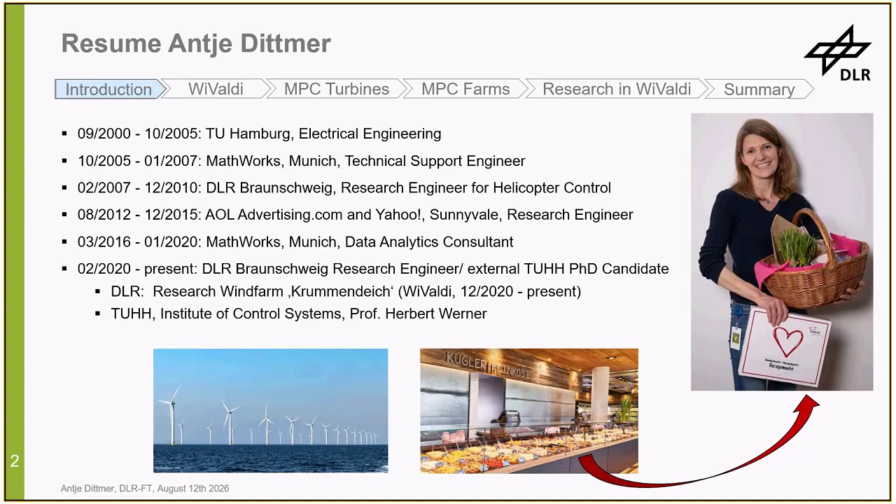I also want to introduce my research organization, the German Aerospace Center, Deutsches Zentrum für Luft- und Raumfahrt, DLR for short. DLR does research in the areas of aeronautics, space, transport, energy, and security. It is the largest German research organization with more than 10,000 employees and now more than 50 institutes.

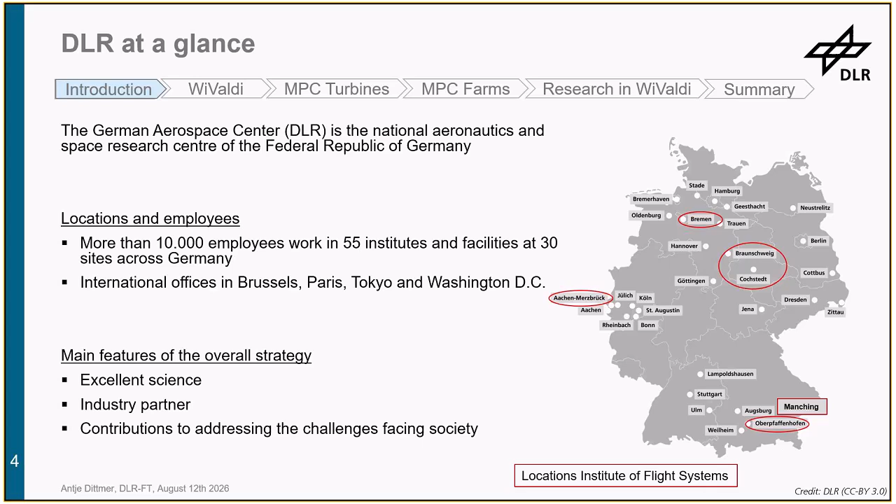placed all over Germany. DLR sees itself as a bridge between academia and industry, fostering cutting-edge research together with universities and bringing that into the real world together with our partners from industry. My institute, the Institute of Flight Systems, has sites at 6 locations.

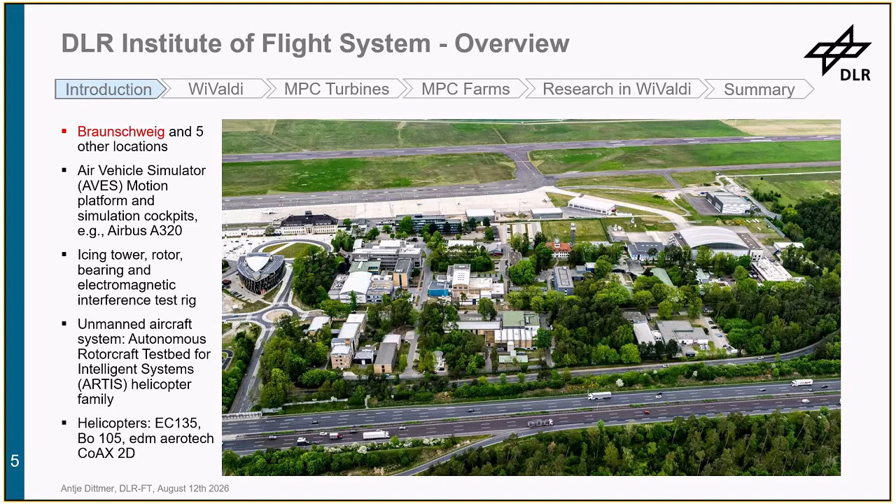This is an aerial view of Braunschweig, where the institute originates from and where most of our colleagues work. It is also home of our largest test bench, the simulation center AVES, where we can simulate the behavior of aircrafts and helicopters. We have also other test benches, including an icing tower, where we can test the behavior of helicopter rotor blades under icing conditions.

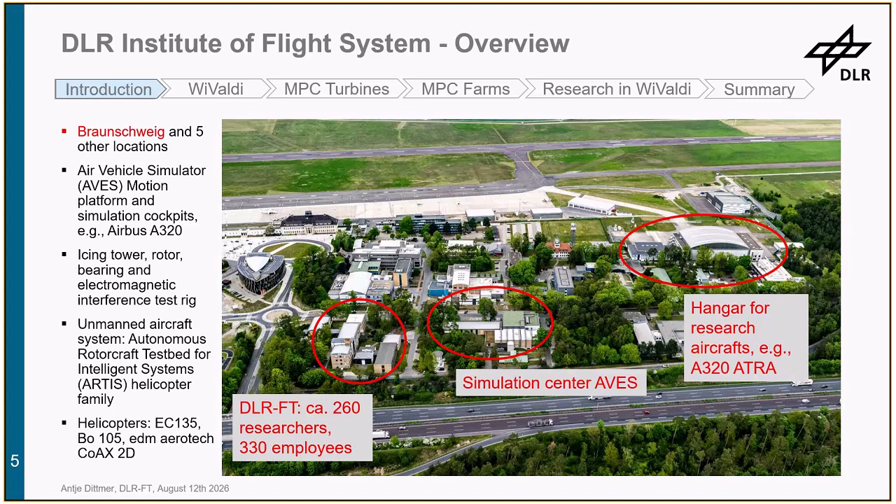We operate several helicopter UAVs. And this is the hangar which is home to some of the aircraft of our research aircraft fleet, the largest one being an A320. We also have 3 research helicopters, a BO 105, an EC 135, and a small coax helicopter.

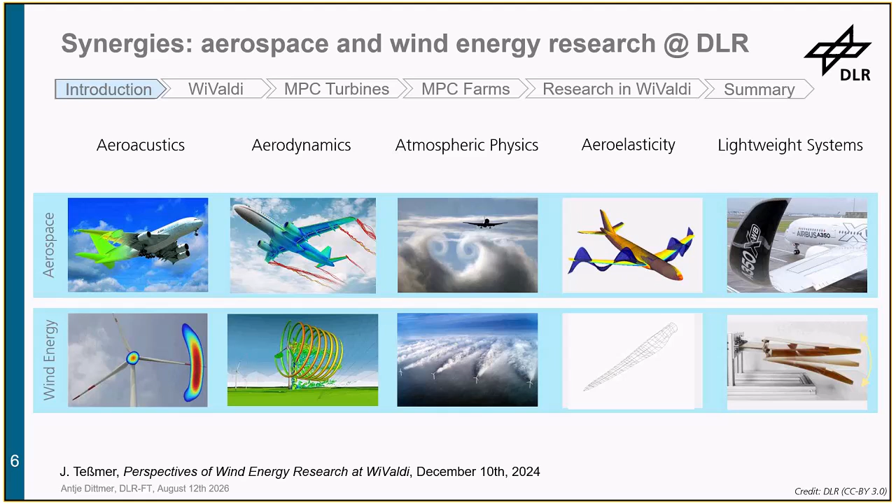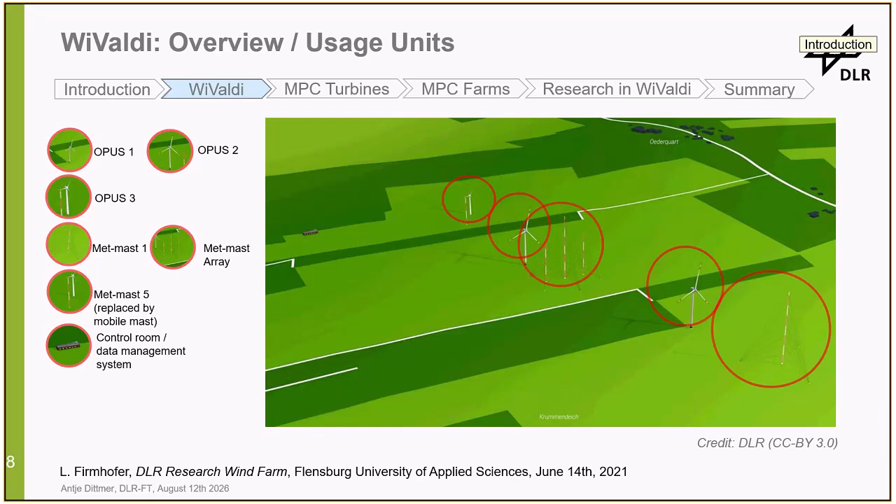The 2 megawatt turbines, Opus 1 and 2, are Enercon E115 EP3 E4 turbines, rated at a power of 4.26 megawatts. So they are normal industry-sized megawatt turbines. What sets them apart is that they are literally equipped with thousands of sensors, so there are sensors in the foundation, in the tower, in the bearings, and in the rotor blades.

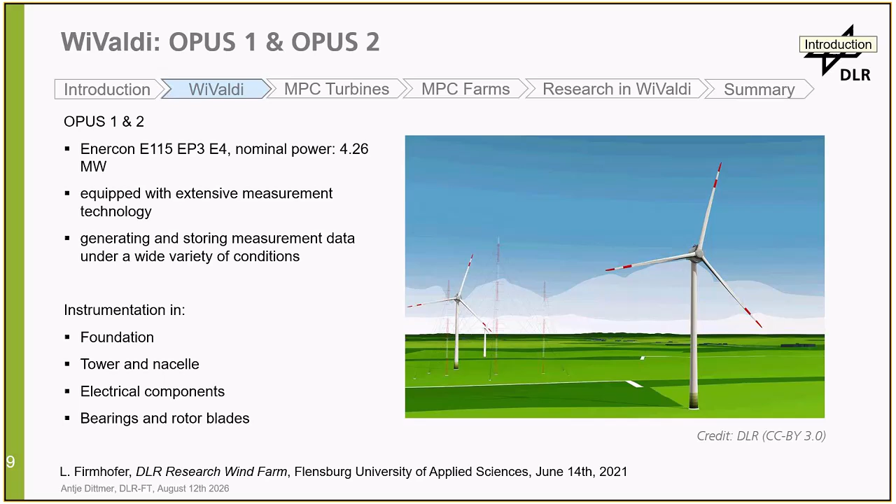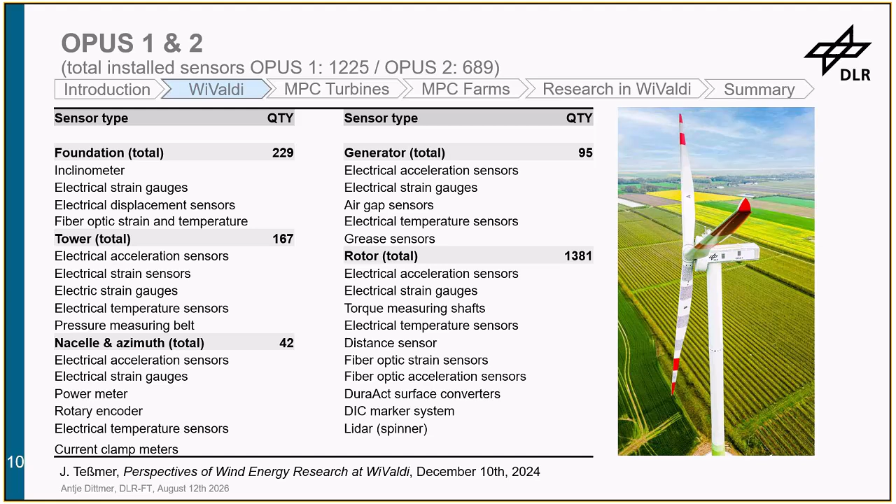This is a list of the sensors which are placed in the first turbine, as well as a picture of it. You can see that the rotor blades have names A, B, and C, and also that there are points on the rotor blades to track their movements very accurately.

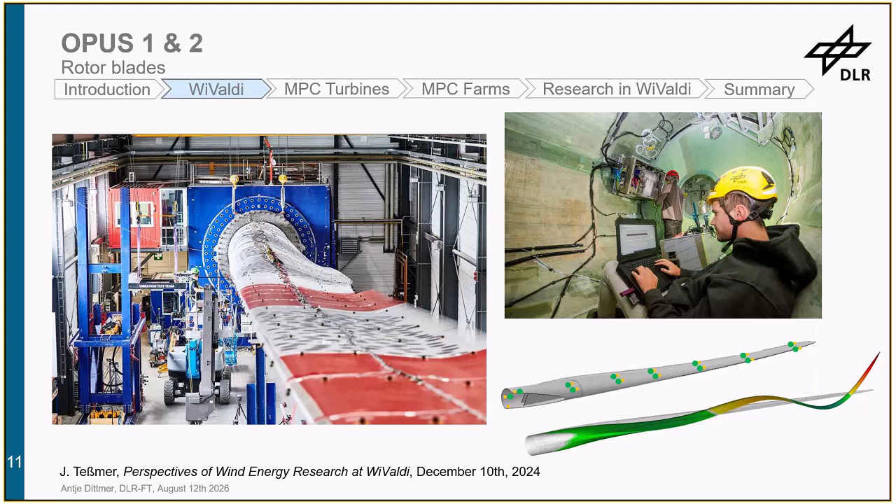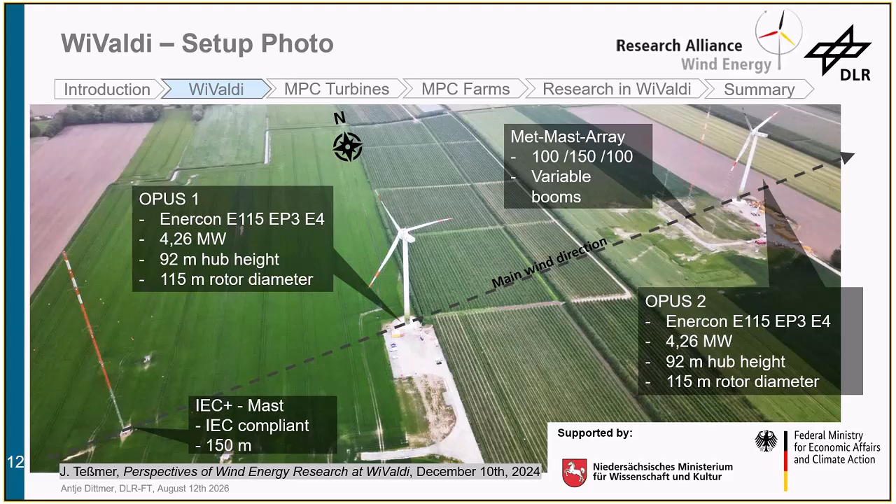So normally you would never place two turbines in main wind direction. We do that to investigate wake effects, which are a major problem for onshore turbines, where turbines are placed closer and closer together. So we want to be able to understand wakes, to be able to mitigate the effects.

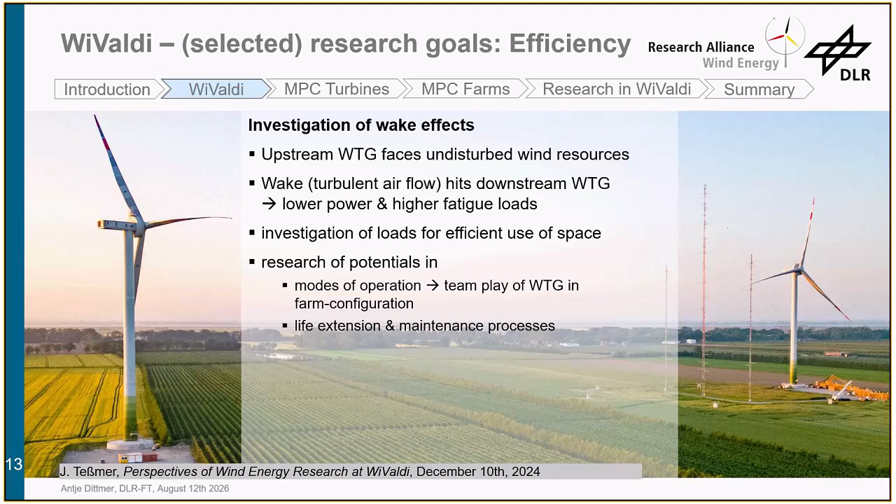First of all, they take away energy from downstream turbines, and then they actually also add loads to them. So there are two aims. First, ideally, we want to be able to increase the power output of wind farms by operating the wind turbines as team players, and by lowering the mechanical loads on the downstream turbines, we also want to extend their life and decrease the maintenance and operation costs.

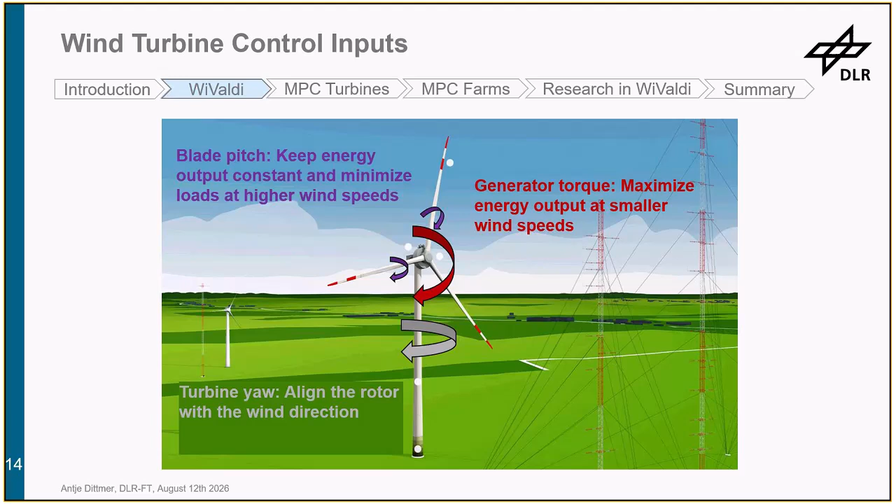These are the control inputs that we have on the turbine. In high wind speeds, we can pitch the blades to keep the energy output constant, as well as to minimize the mechanical loads acting on the structure. In lower wind speeds, we use the generator torque to maximize the energy output. And then finally, we can also yaw the turbine to put it into the wind.

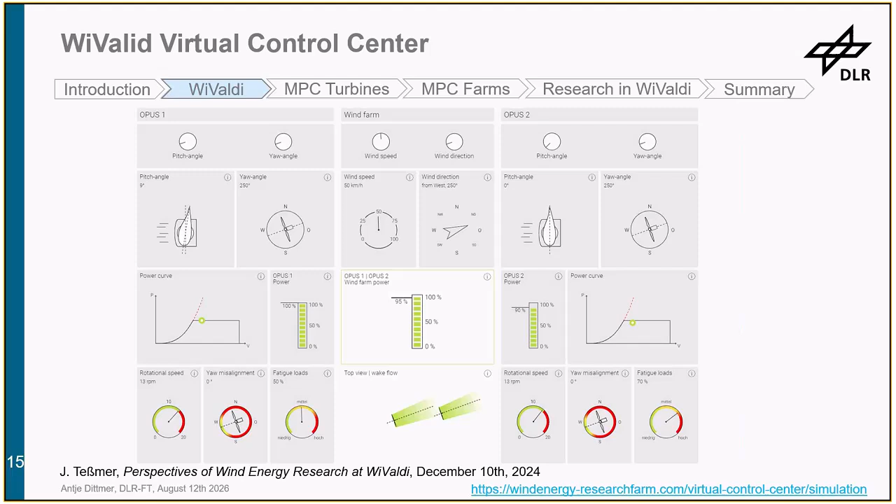Here, this turbine is operated at rated wind speed. You can see the power curve with the power increasing with the wind speed taken to the power of 3. And then at the rated power, the wind is kept constant by pitching, the power output is kept constant by pitching the blade.

The first turbine is set directly facing the wind, and we see that the power output is at 100%. What we can also see is that the wake of this turbine covers the second turbine, and we see that its output is only roughly at 90%, and the fatigue loads are actually at 70%.

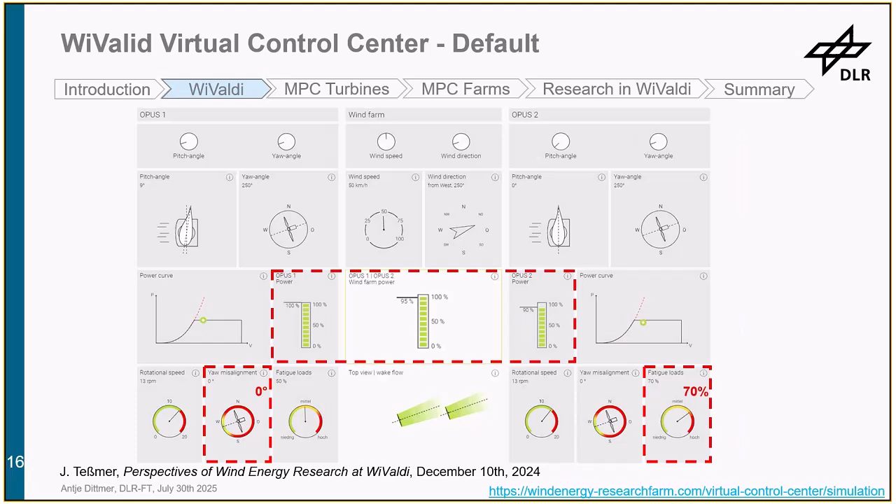Now, if we slightly misalign the first turbine, so that we have here a yaw misalignment of 5 degrees, we see that with that we get the fatigue loads down to 60%.

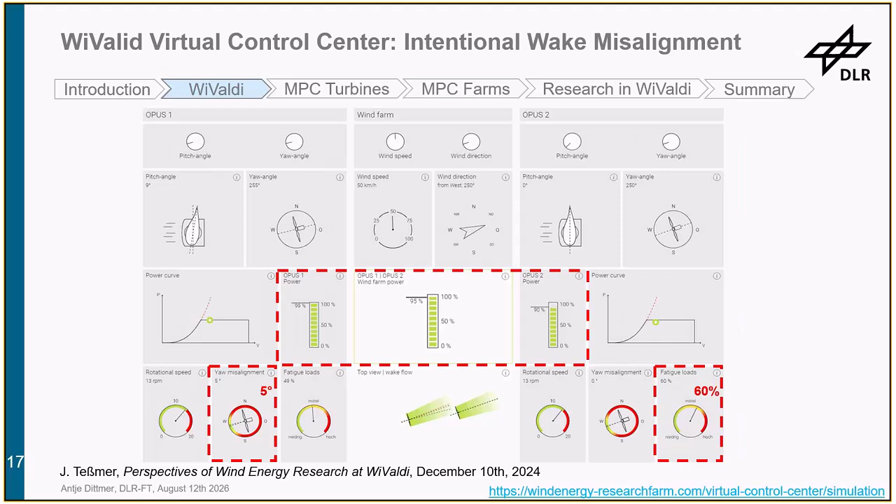I want to switch gears now and talk about how we can use model predictive control to decrease the loads acting on turbines. So wind turbine control can be seen as a multi-objective optimization problem. We want to maximize the generated power while minimizing the mechanical damage equivalent loads and the actuator activities subject to actuator constraints.

This is a very active area of research because the size of turbines has increased considerably over the last years, and with that the turbine tower and blades have become much more slender. Modern control algorithms have been shown to be very effective at decreasing these loads. However, this typically comes with an increase in pitch actuator activity.

I conducted an automatic Google Scholar search just to show you how much research effort goes into this. So obviously it's impossible to list all the papers, so I just listed 4 which were important for my work. One of the first papers is from David Schlipf, who investigated a collective pitch control MPC, so setting the pitch of all blades collectively. Then another possibility is to optimize them separately, so individually.

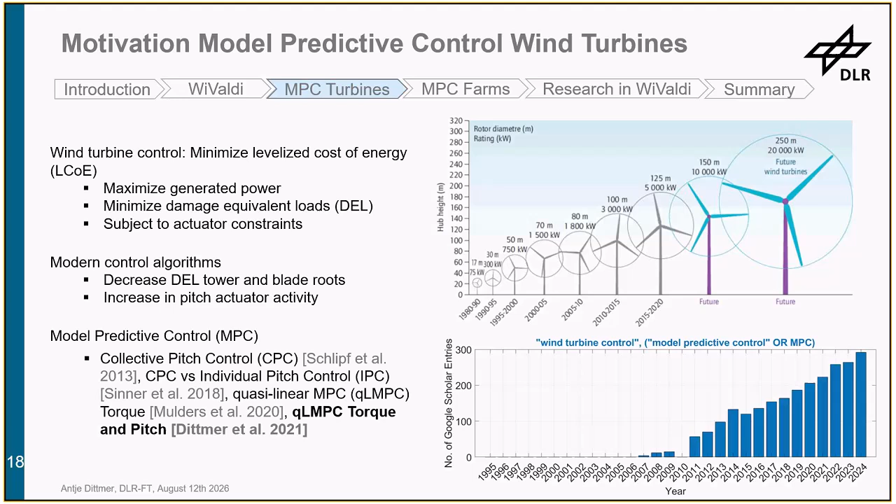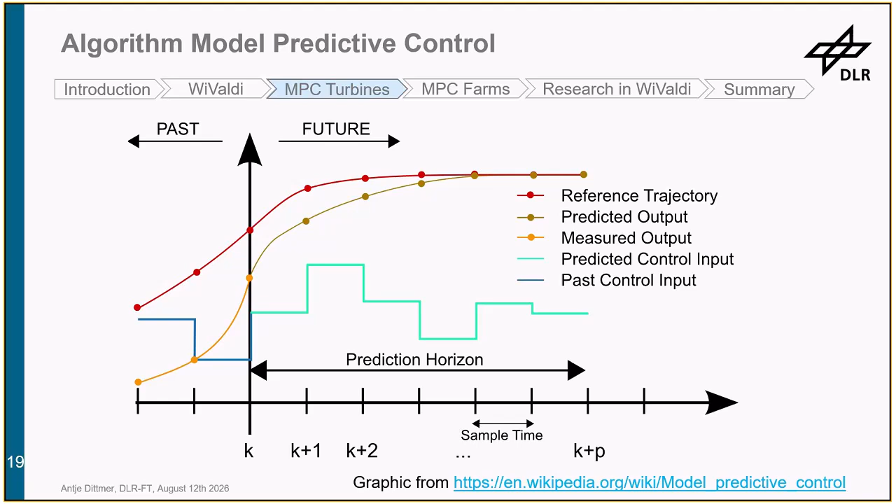For wind turbine control, we use a non-linear MPC because the mechanics and aerodynamics depend non-linearly on the wind. Then we linearize this around certain operating points, so we really use quasi-linear parameter varying modeling.

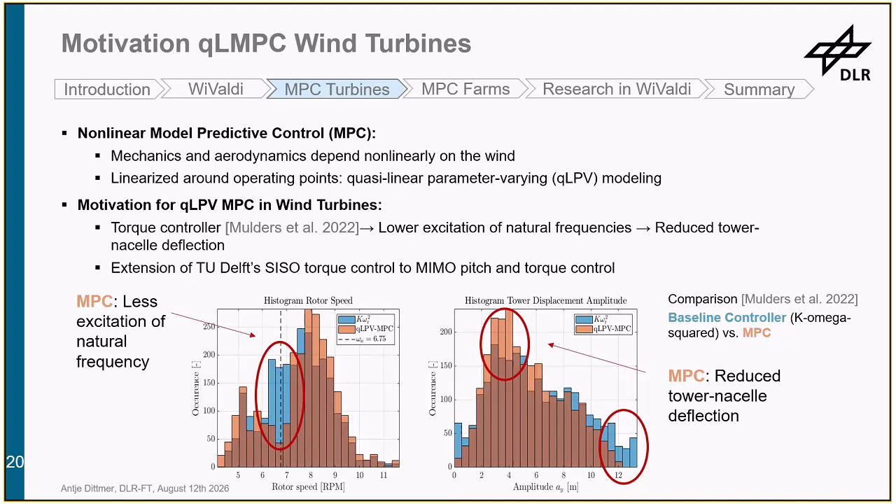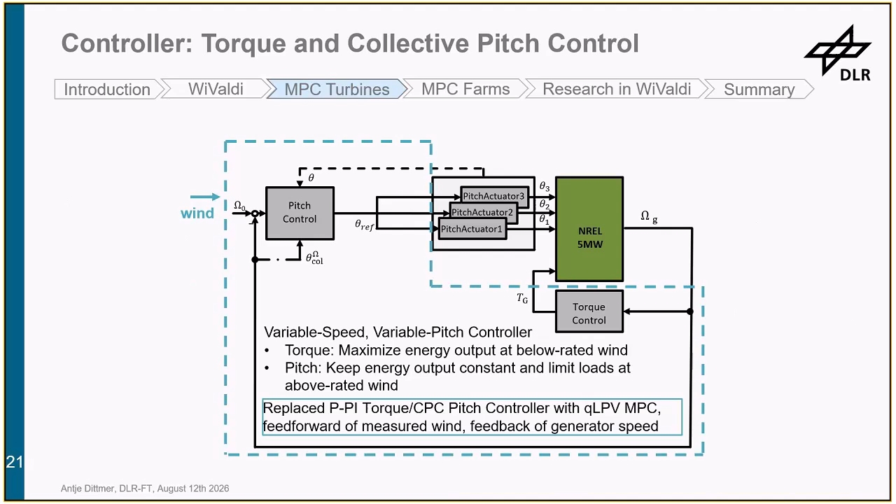Now, both of these signals are replaced by calculations done with our MPC. However, what we also use is that we assume that we have good wind knowledge to set the control signals of our MPC.

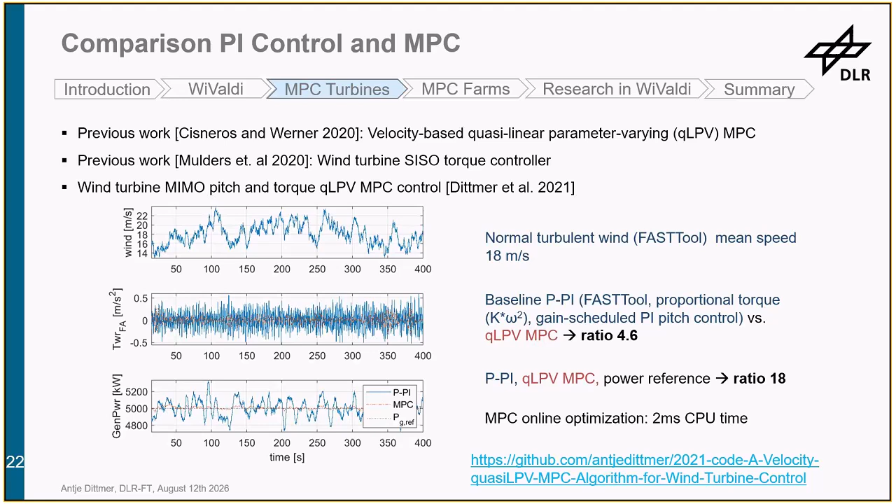Now, I mentioned before that this decrease in excitation and in power variance comes at the price of an increase in actuator activity.

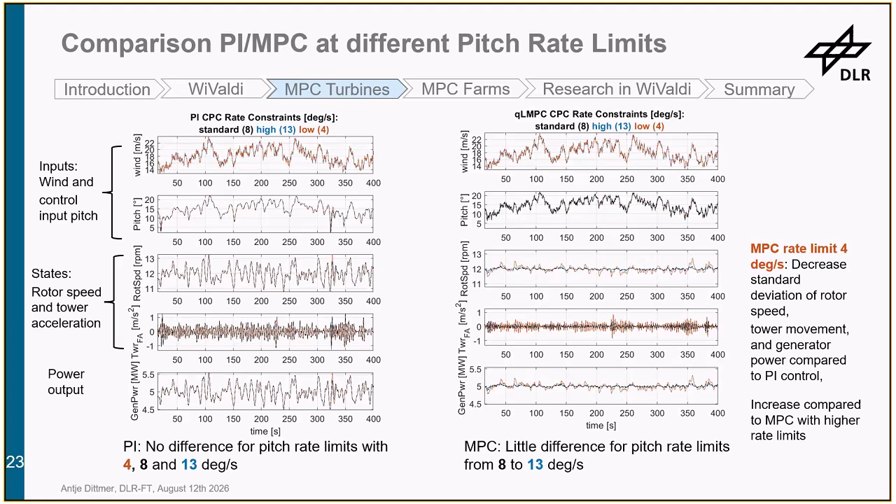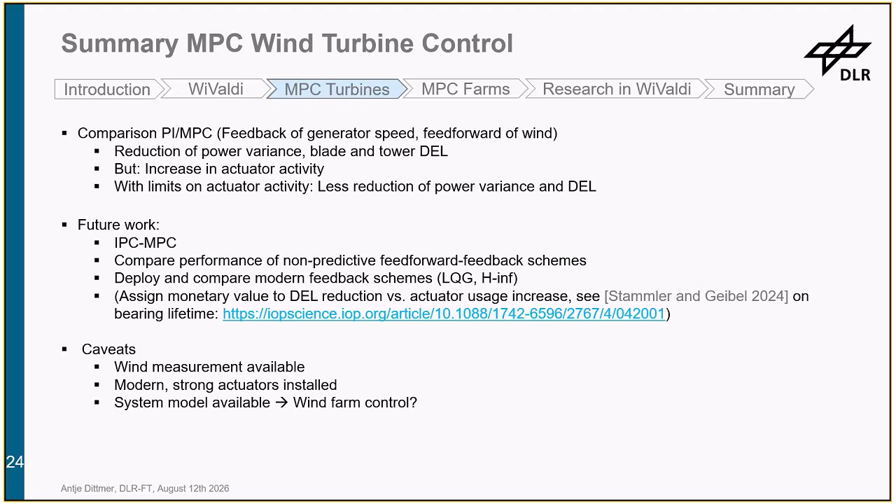Wind turbines are grouped into wind farms to make efficient use of areas suitable for harvesting wind energy. Wind farms also decrease the cost of connecting the wind turbines to the grid per turbine, as well as their operation and maintenance costs. However, wake interaction between upstream and downstream turbines leads to considerable power loss and adds additional mechanical loads on downstream turbines.

So again, we have a multi-objective optimization problem. We want to maximize the generated power or keep it as close as possible to a reference power. At the same time, we want to minimize our mechanical damage equivalent loads as well as our actuator activity, subject to actuator constraints.

There have been different methods suggested for wind farm control. In axial induction control, we throttle the power of upstream turbines to have more energy available downstream. And in wake redirection control, we change the yaw to redirect the wake away from downstream turbines.

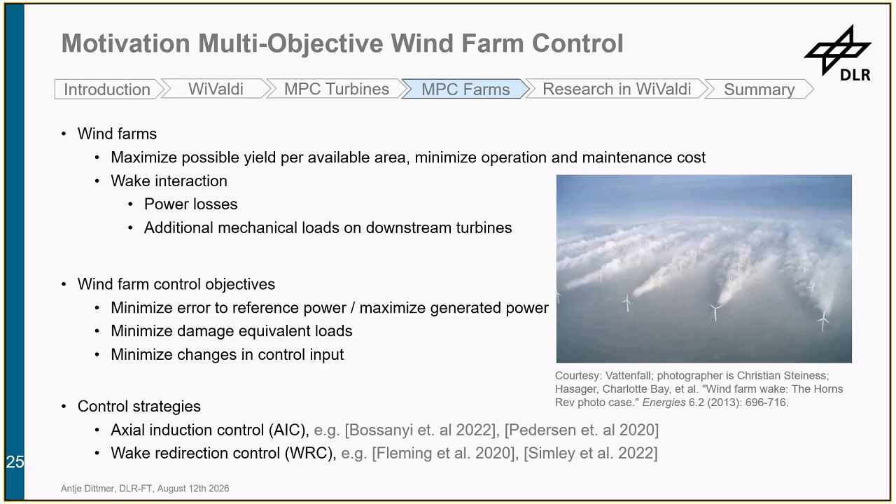We use Koopman-MPC. The idea of Koopman is that you can approximate any nonlinear system with a higher order linear model. This has been done for wind farms by Cassamo and van Wingerden from TU Delft.

What they did was use the CFD tool SOWFA to generate a 3D grid with 100,000 grid points, and then they flattened these points into vectors, applied Koopman lifting functions to them, and then singular value decomposition to reduce the order.

From that, they built linear models and then used them in MPC. We showed in our work that we actually don't need 100,000 grid points, but that we can improve power reference tracking by using physically motivated Koopman lifting functions.

We showed that we are actually really real-time capable by only using the average wind speeds at the rotor disks. Also, that if we have sudden changes in wind speed, we are able to track them with adaptive MPC. And then we showed that with a combination of wake redirection control and axial induction control, we are able to maximize power yield.

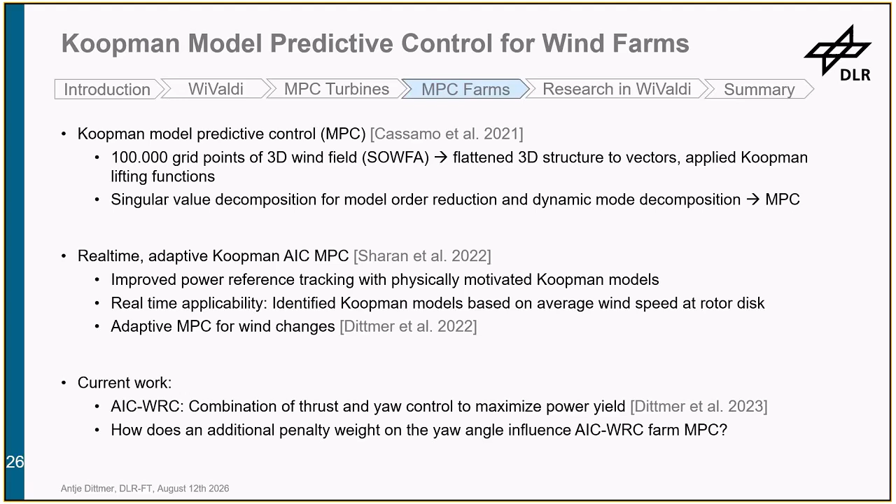We used the WFSim simulation environment from Boersma from TU Delft. This is an openly available MATLAB simulation environment, which is based on linearized 2D Navier-Stokes equations, where the wind turbines are modeled as energy sinks. We used it both for open loop data acquisition and for closed loop controller tests. We always assumed that we have a constant free stream wind of 8 meters per second.

The inputs that we have are the thrust control signals of the first and second turbine, as well as the yaw angle of the first turbine. We also assume that we have the wind speed in front of the first turbine available. The states that we have are the average wind speeds of the first and second turbine, and then our output is the total farm output.

These are the signals that we use to build our Koopman model. And then in closed loop controller tests, we have an additional signal: we use the grid power reference, P-ref.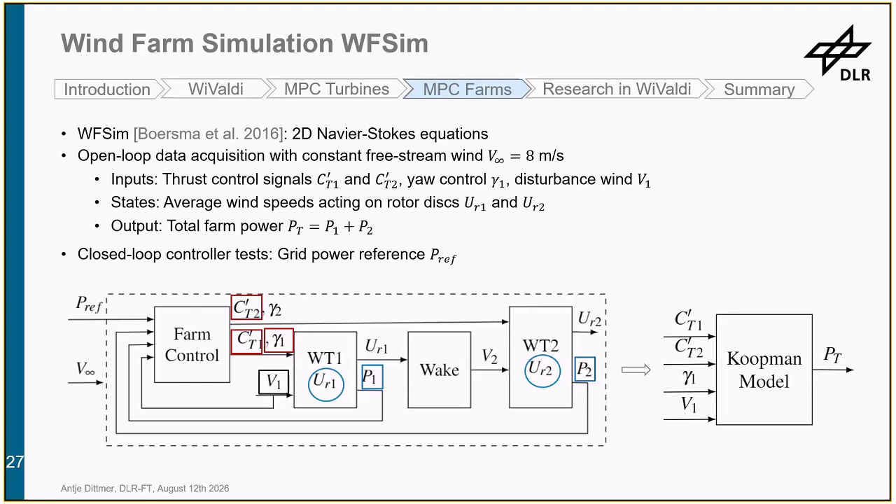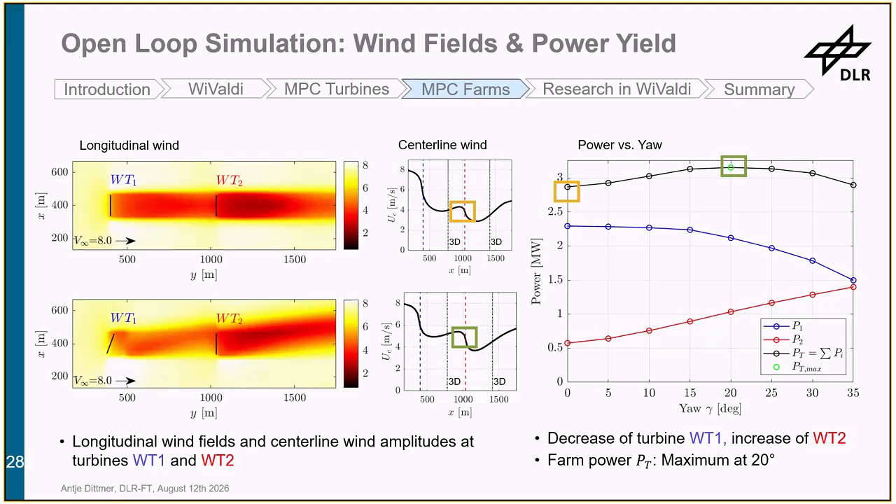So as I said, we used Koopman-MPC, and the idea of Koopman is that you can represent any nonlinear finite dimensional system with a linear infinite dimensional system. So our goal is to approximate our nonlinear system with a finite linear system.

I want to show you an example where we are actually able to completely represent the nonlinear system with a linear finite system. It's taken from a Brunton paper from 2016. So we have a second order nonlinear model with two states.

And you can see that the second state, which I called V, depends nonlinearly on the first state U.

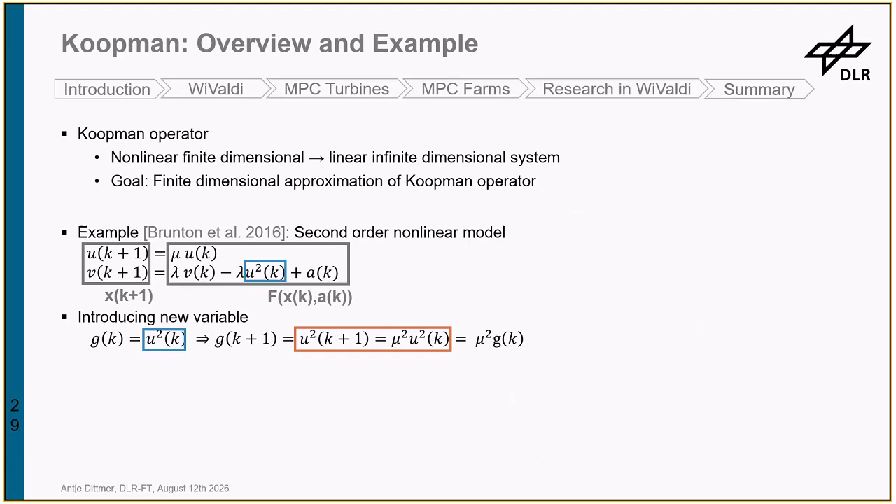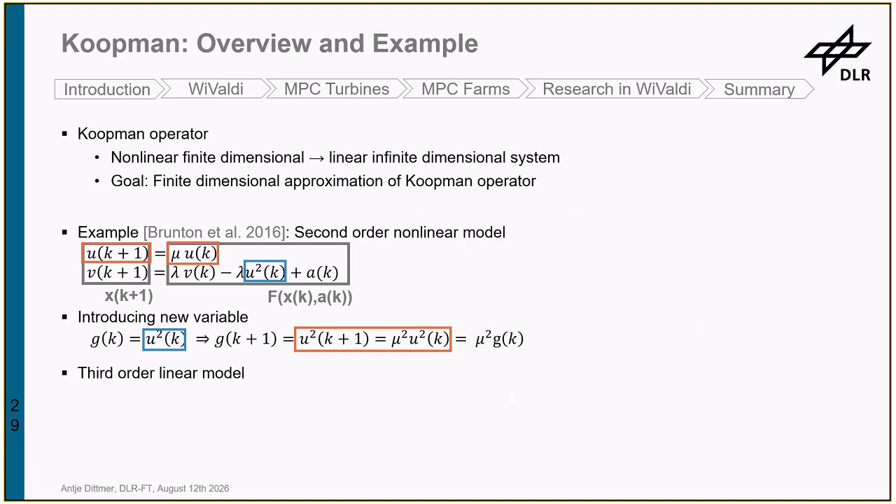So what we do is we introduce a new variable, which we call g of k, which equals u squared of k. And then if we move that ahead one step in time, we see that this would, because we have u squared k plus 1, we could just use the knowledge that u k plus 1 equals mu of uk and plug that in, and then get that we have mu squared of g of k. So now we really end up with a third order linear model.

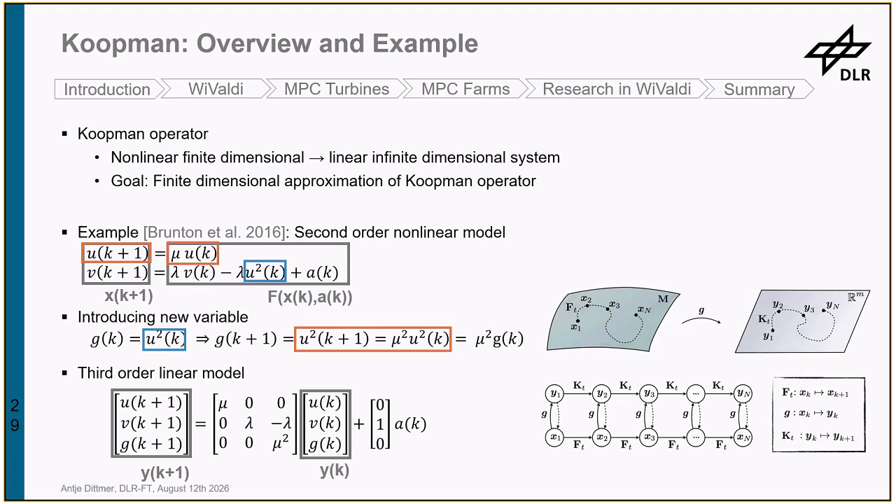In our example, we don't have a closed form solution. So what we do is that we run our simulation environment in open loop, and we collect data for the states, which are effective wind speeds, for the inputs, so the thrust controls, the yaw control, and the wind speed in front of the first turbine, as well as our output, which is our wind farm power. And then we apply Koopman lifting functions to the state.

In our case, because we are looking at a wind farm, we use square and cubic terms, which represent the force and the power. And then what we do is that we append this data, formulate our optimization problem, and we solve this optimization problem to get our Koopman matrix.

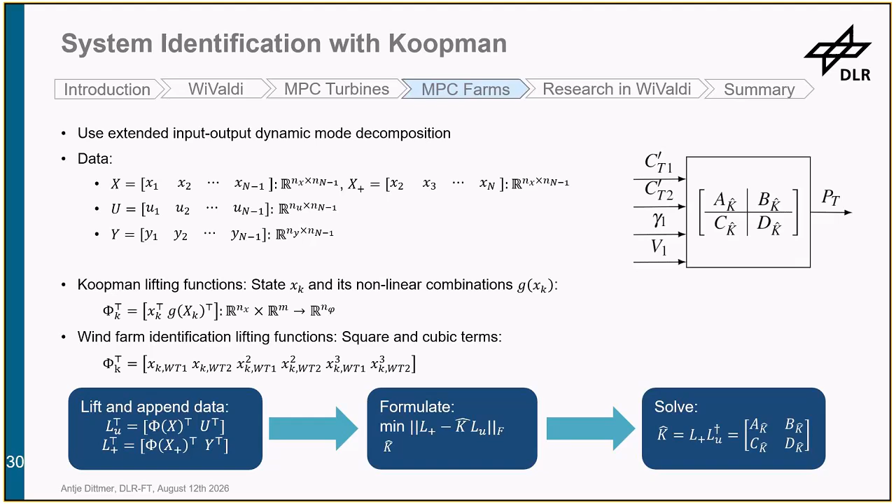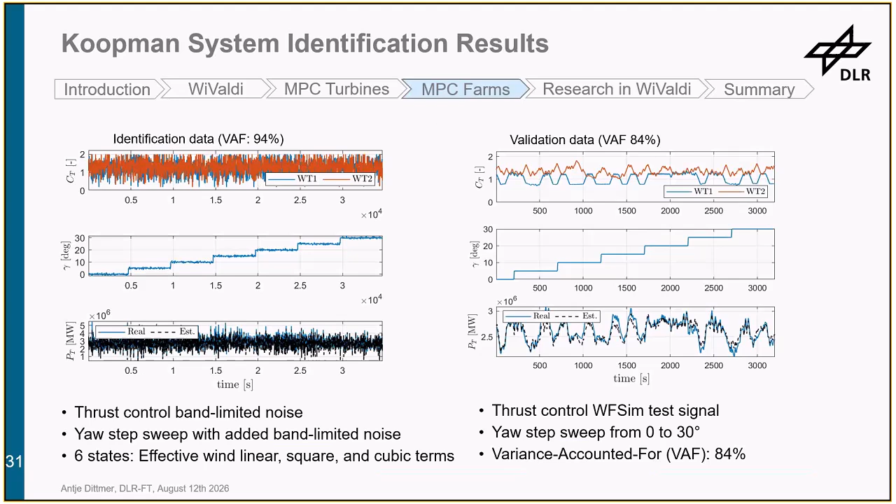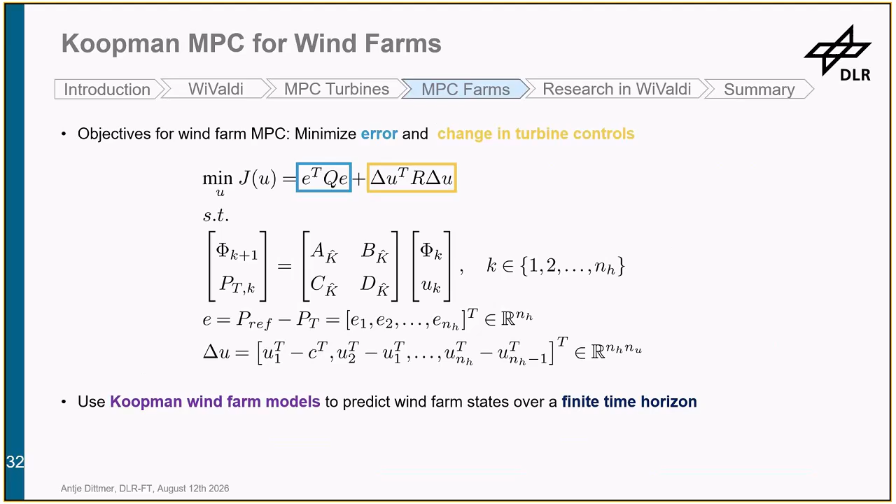This is then the Koopman-MPC that we implemented. The objectives for our wind farm is that we want to minimize the error and minimize the change in turbine controls. We used the Koopman wind farm model that we built to predict the wind farm states over a finite time horizon. Then we solved the optimization problem to obtain the optimal control inputs for each turbine under certain constraints.

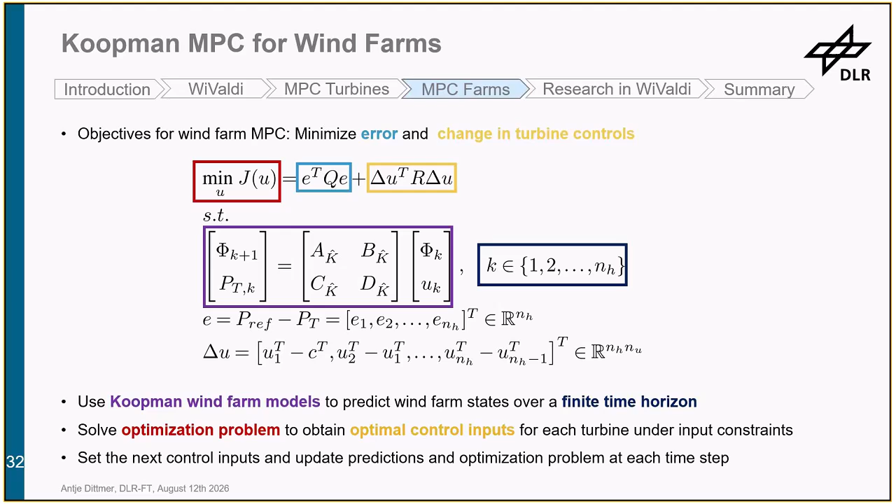We set those control inputs to obtain the next step, and then update our predictions and optimizations at each time step of our simulation.

This is the results that we get with the baseline controller. That's an axial induction controller, so we do not change the yaw. In the first plot, we see the power output, the whole farm output depicted as a purple line, the reference power as a solid black line, and the green dotted line, that's the greedy power, so the power we get if we operate both turbines at maximum thrust completely aligned with the wind.

What we can see is that we are first able to follow the reference relatively nicely, and then the wake from the first turbine catches up with the second, and we lose the power and fall back to greedy power. In the third plot, we see that because this is axial induction control, we do not change the yaw angle at all.

And now in our combined wake redirection control, axial induction control, we allow the yaw in the third plot to change, and what we can see now is that we are able to track the reference very nicely.

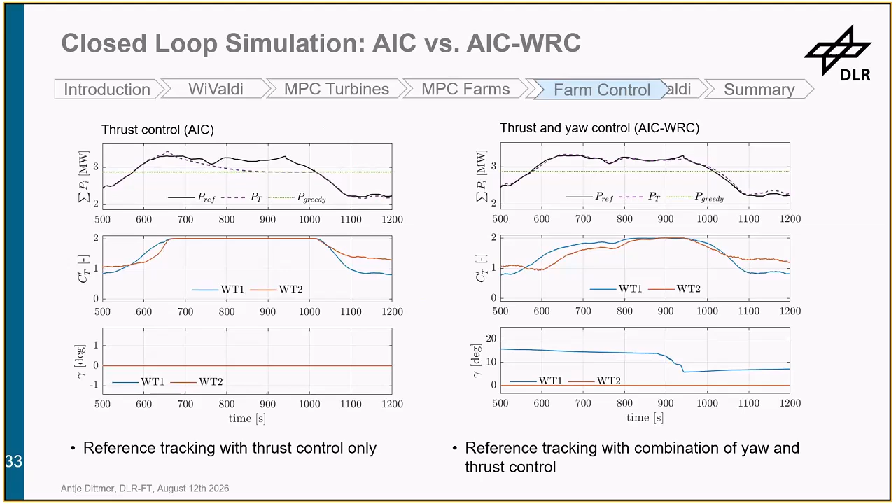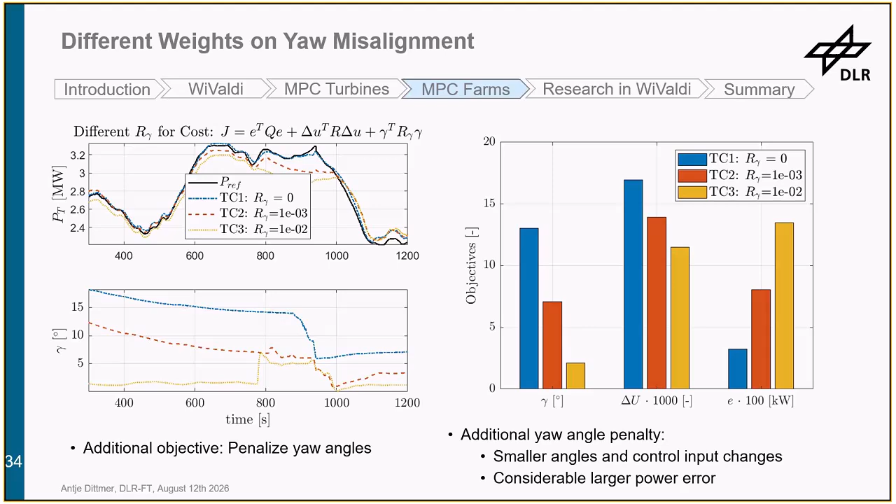So in summary, what we saw was that we are able to increase our power output by using wake redirection control. We also saw that with Koopman-MPC, we got a good variance accounted for in open loop and good reference tracking in closed loop. Also, this code is openly available on GitHub.

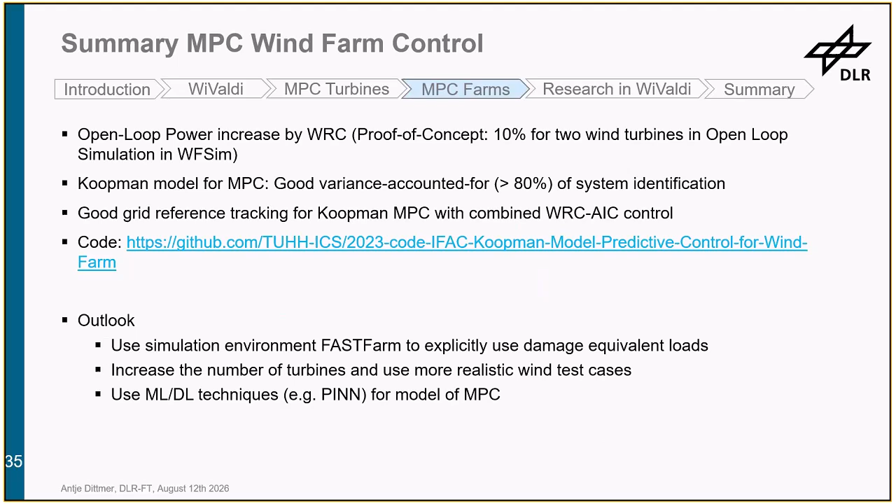Future work would include using other simulation environments which model the wind turbines more as physical systems, so that we are able to investigate the damage equivalent loads. Then also to increase the number of turbines and use more realistic wind test cases - that's actually something I'll talk about at IFAC. And then also use different techniques to model the wakes between the turbines.

I also said that I briefly want to talk about projects that are ongoing in WiValdi. This so far was just simulation work. So we currently have a system identification project ongoing where we want to excite the actuators that we have, adding some noisy inputs, specifically sine sweeps, to the pitch angle to be able to identify the modes of the turbines. The aim is to get better models and then use them for better lifetime predictions.

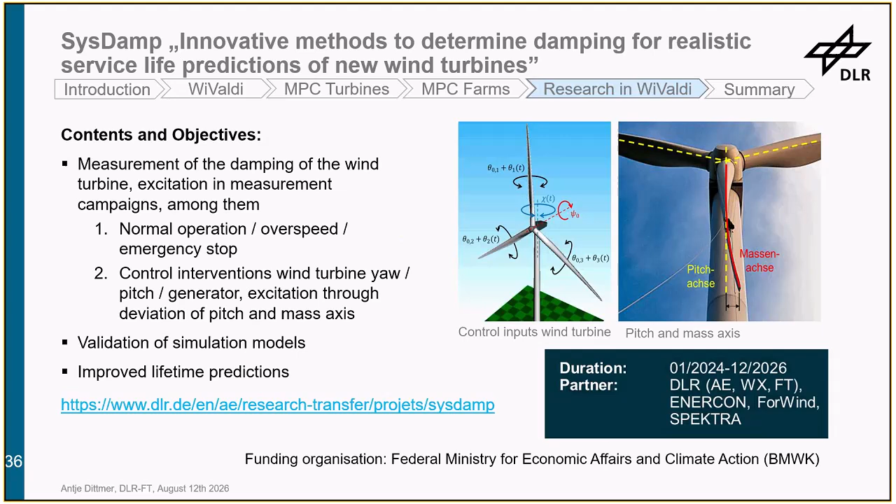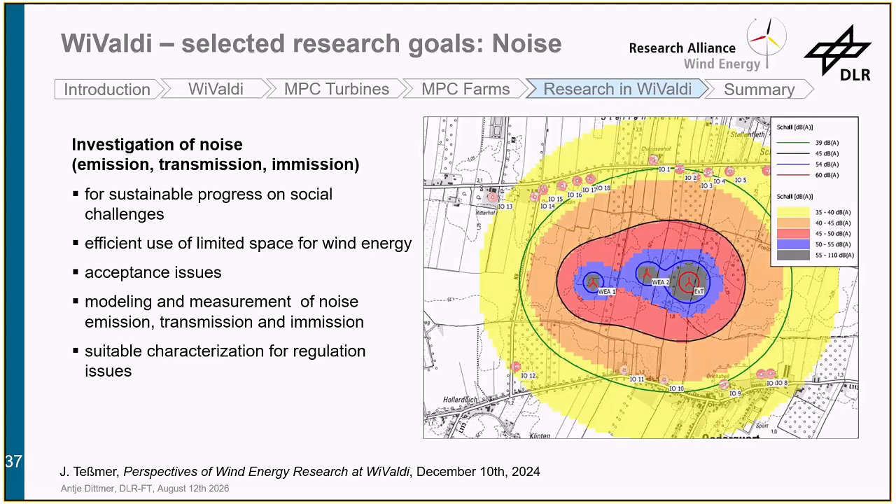I did not talk in detail about that, but another research question in WiValdi is that we want to investigate noise. Having a good noise model is very important for social acceptance of wind turbines. It's also important for efficient use of wind turbines, because at the moment the noise models are very conservative, so we sometimes derate wind farms which would not necessarily need to be derated to stay within acceptable boundaries. This is something where we hope WiValdi can really help, just because we have so many sensors installed that it will help improve the currently available models.

So this is a simulation that a colleague of mine set up, which shows very nicely the noise carpet below the turbines as they are rotating.

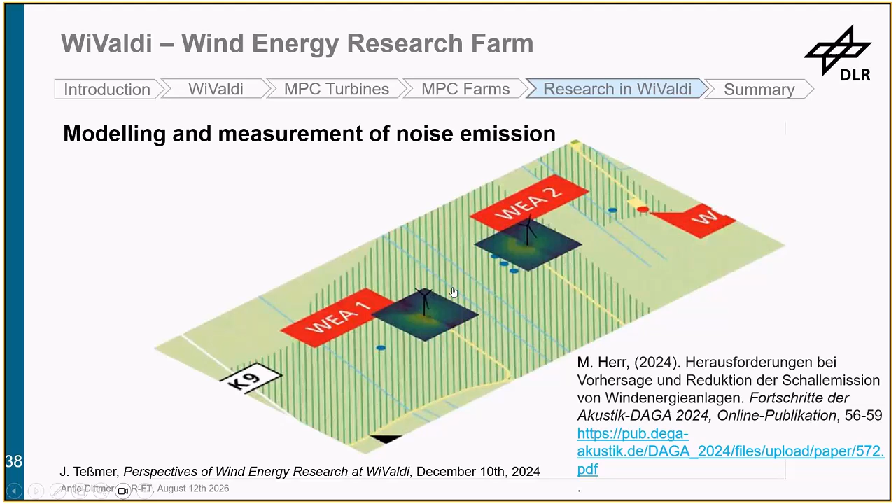So in summary, WiValdi meets the research needs. We are able with it to investigate how we can use the space available for wind energy as efficiently as possible. We will be able to investigate and model noise emissions and immissions important for regulations. And WiValdi will also help model and see how wind energy can be coupled with storage and how we can use wind farm control for good grid reference control.

So I now talked a lot about the how of wind energy control and wind farm control, but I also want to briefly mention the why. This is a chart I got from the site climate.gov, which unfortunately does not exist anymore because it was taken down by the Trump administration. But what it shows very nicely is the effect of climate change mitigation policies on temperature increases in the future.

What you can see in red is the prognosed or predicted temperature increases if there's very little change in climate policy. In green, if there's a medium change, and in blue, if there are now strong changes implemented. What you can see is that these curves actually diverge now, in the 2020s. So actions taken now will have strong influence in the next decades, and efficient wind farm control is a very effective way of influencing our energy policies now.